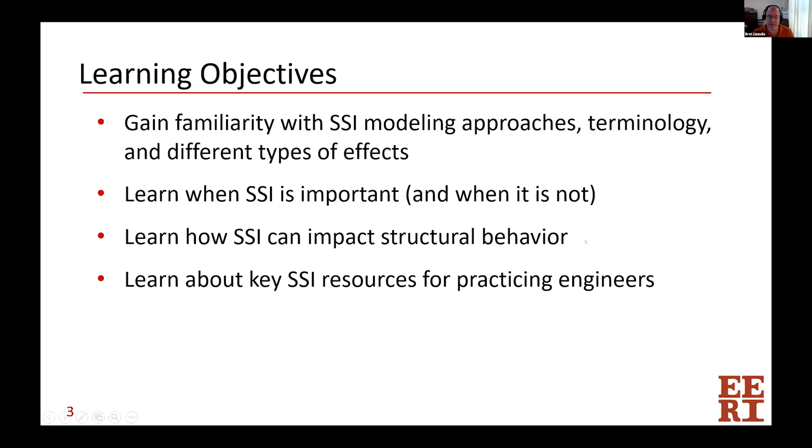And then an understanding of some of the key resources that have been developed in recent times to help engineers implement this. So let me start first with some terminology. Every discipline has its lingo, and this is one set of terms that's been developed and I think has a general consensus in the community.

So we'll start with this building on the left that's embedded one story into the ground, and that UG there on the right is denoting the free field motion that comes up through the source and eventually reaches the site, and would be there, what would be experienced if the building didn't exist. On the way it's getting there, that's what it is. And then it's going to change as it gets closer to the building. So there's kind of two basic categories of effects that are part of SSI.

One is called kinematic effects and the other is called inertial. Kinematic interaction changes that free field motion, and what the building at the bottom feels is that foundation input motion, which is not the same thing. Inertial effects are a little bit like the inertial loads that we are used to in the superstructure - the mass of the building being accelerated and generating forces that the members have to resist. A similar thing happens with the soil that's near the building and the foundation itself, and there's a combined soil structure effect that includes those inertial issues.

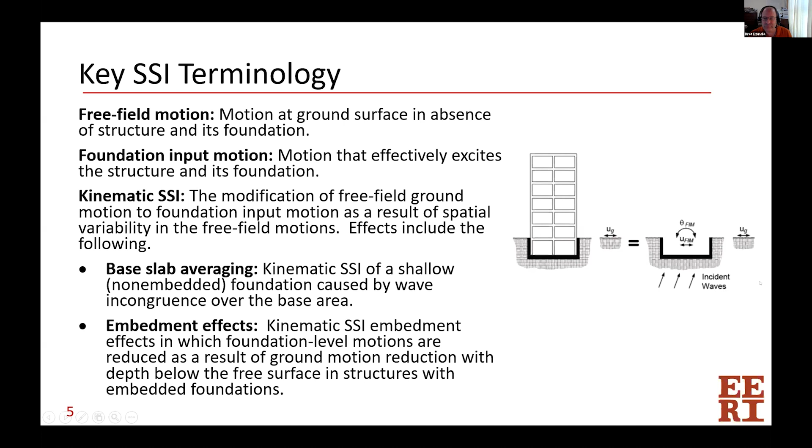So on the inertial side, three effects are commonly identified. One is that if we account for the softness and flexibility of the soil and its ability to augment the movement of the superstructure, the building can tilt more than it would if you just fixed it unrealistically hard to the ground. Then that will increase the building period, and that period lengthening can affect the way response spectral forces are experienced in the building. They can go up and they can go down - they typically go down, and we'll talk about that in more detail.

Two other effects, less commonly implemented or even discussed by structural engineers, are two forms of damping. One is called radiation damping, where that damping in the soil structure system of the combination of the foundation and the nearby soil is caused by the generation and propagation of waves away from the foundation, which are in turn caused by different dynamic displacements of the foundation relative to the free field displacement. So the ground and the building are in contact and moving, but not necessarily moving identically.

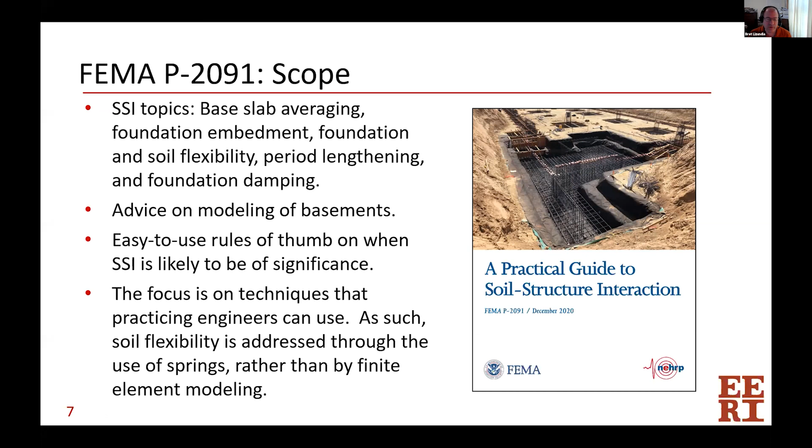We're focusing on techniques that practicing engineers can use. So this is less a sophisticated treatise on finite element nonlinear modeling and more a discussion about the wonders of springs, and when to use them and how to do that.

Sophisticated infrastructure projects, a nuclear power plant, a buried liquid gas tank, an important underground subway, might be done this way, where the soil elements in a big model are also finite elements. The vicinity around the boundary of the structure is done a little differently, but with similar kinds of elements, and then the structure itself is part of that.

This is computationally intensive and requires a lot of skill, knowledge, and usually special software to do. That is not what typically happens in the structural engineering community for buildings.

What we're used to using as a building engineer is a much simpler substructure approach rather than a direct analysis approach, where we put vertical and sometimes horizontal springs underneath the bottom of the building to represent the soil and sometimes the foundation flexibility. That's the focus of this design guide and the focus of what I'm talking about today.

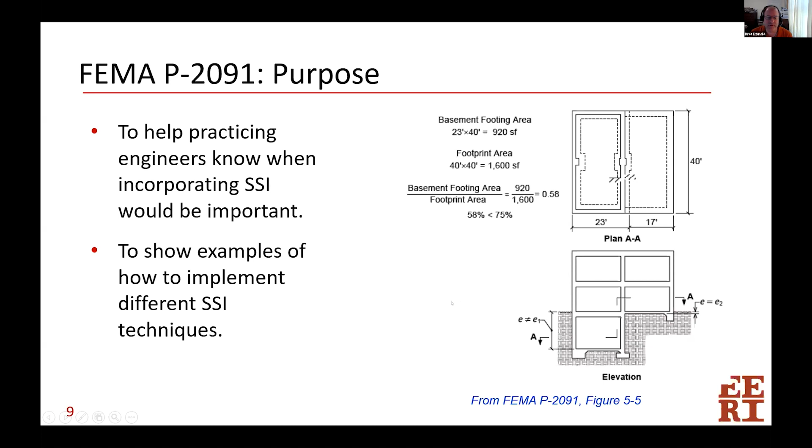So we have lots of pictures like this of different examples to help people understand what are sometimes kind of cryptic provisions in the building code.

The target audience is obviously engineers, of two kinds. Our primary audience is practicing engineers who are definitely familiar with seismic design—they've designed buildings but may not have ever implemented or used SSI. They may have just fixed the bottom of their buildings, doing a great job, understanding the building code very well, but now face a need to deal with SSI, and this is something they can turn to. The secondary audience is people with a little more experience who may have done some soil structure interaction work, often with vertical springs on a past project, but now want to go farther and tackle other areas of SSI.

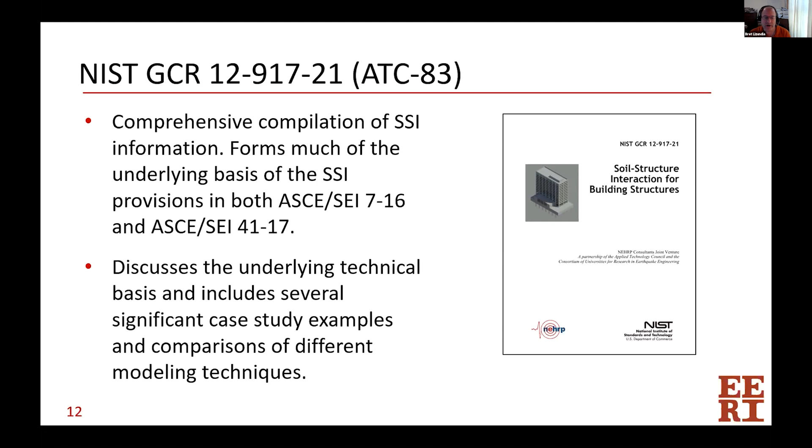Besides that, we had some significant case study examples. It was pretty sophisticated, and to use this you would usually be relying on a very knowledgeable geotechnical engineer who would take advantage of it. So it wasn't intended, nor is it really that easy to use, for your average structural engineer like myself.

So this slide, I wanted to give you a feel for kind of the world of other resources that have happened and the progression over time, because it's not just the two documents I've mentioned so far. There's a whole lot of work.

Early SSI has been around for a long time. Lots of papers and analyses and work was done by some seminal researchers in the field. But from the everyday building side of the world, it was relatively little used. It was perceived as challenging, difficult, with a lot of really long equations that you needed to be fairly experienced to understand, so it was rarely implemented in everyday practice.

Then there was a group of FEMA and ATC documents where this began to be included in a more practical way with provisions. Then this seminal work that John was in charge of came out, and the newer updates to ASCE 41 and ASCE 7 included that. There was a design guide, the FEMA P1051 design guide, which provides worked examples for how to design buildings for seismic issues in general, including some discussion of soil structure interaction.

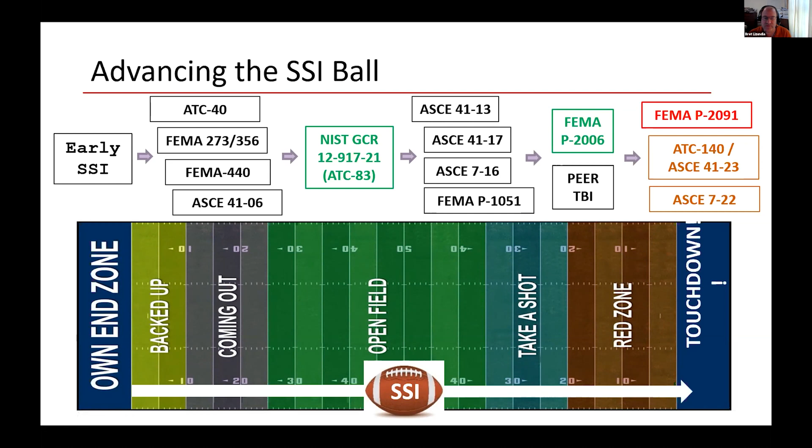So let me go over one of those earlier chapters to give you a feel and hopefully some takeaways, particularly for those of you where this is somewhat new. When is SSI going to be likely to be important? Some of these are pretty simple, and I've already mentioned them to some degree.

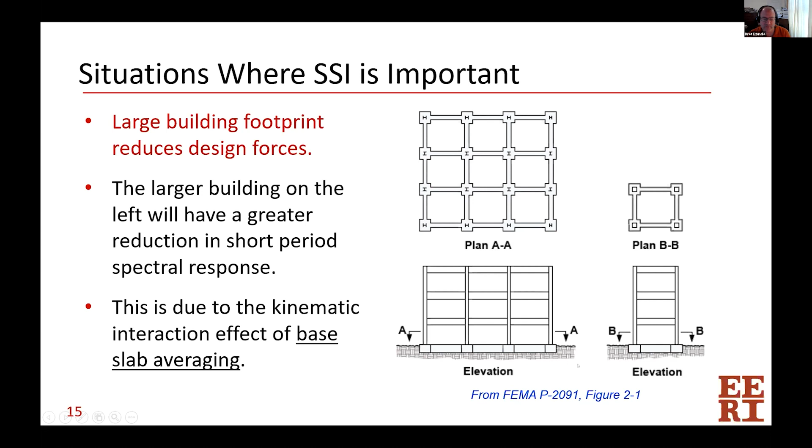Somewhat similarly, the other kinematic effect of foundation embedment tends to reduce that. So the building on the left, if it had the exact same footprint but has 2 stories of basement embedment, will tend to have lower forces. Both of these effects tend to be a short period focused issue - the reduction in the long period range is usually negligible, but the reduction in the short period range, and these are short period buildings on the screen, is where it matters, where this kicks in.

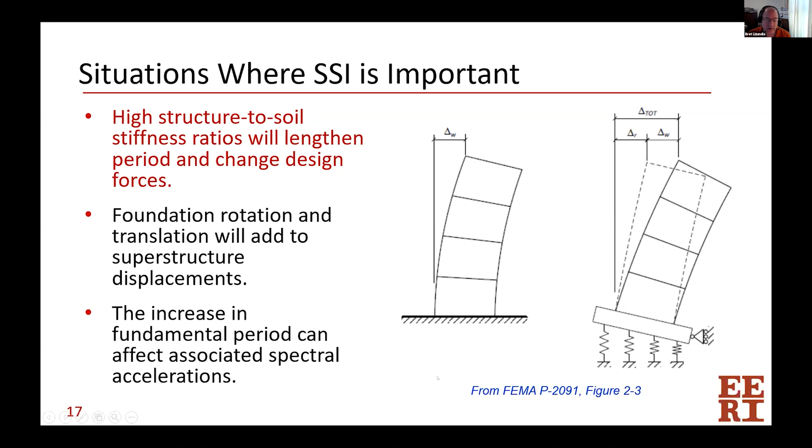On the inertial SSI side, if we have a high structure-to-soil stiffness ratio—meaning the building is stiff, like a shear wall building, and the ground is soft—then we tend to get more rocking. If we model a cantilevering shear wall as fixed base, the superstructure has movement and displacement at the roof, call that delta W. If we model that with springs to account for vertical soil deformation, that translates into additional horizontal displacement at the roof, delta F, increasing total displacement. That increases the period, which changes where you are along the response spectrum.

For example, if we're a short, stiff building and we increase the period, we might climb up a site-specific response spectrum and actually increase the forces at the first mode. On the other hand, and a bit more likely, if we're on the downward side of the spectrum and we increase the period, we go farther down and tend to decrease the spectral accelerations the building experiences.

This up-and-down movement of shear walls or brace frames can not only change the period but can change how the building behaves, sometimes in fundamental ways. Here's an example from the ASCE 41 design guide, slightly modified. In the fixed-base model, you can see the deformed shape at top, and the critical element is the bottom-story compression brace, which is highly overstressed—the utilization ratio, Perform 3D's term for demand-capacity ratio, is way over 1. The weak link here is compression buckling.

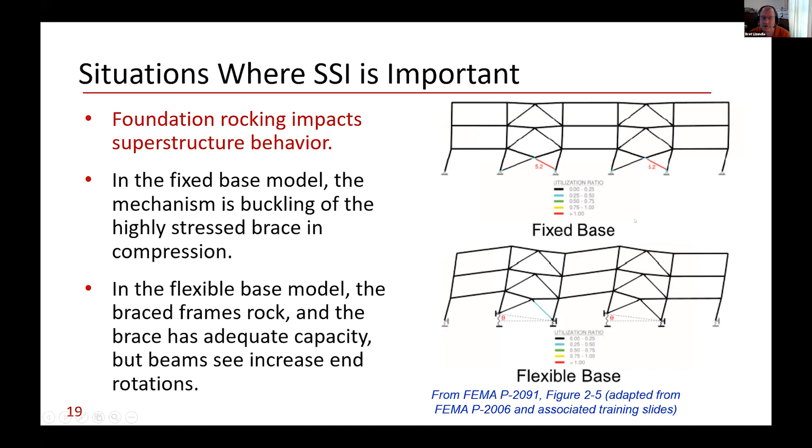But if we model foundation flexibility with vertical springs, the bottom picture shows a totally different behavior—we get rocking of the brace frames, and the demand-capacity ratio in the compression brace drops dramatically. We get more movement in the beams and beam-to-brace connections, but less demand on the brace frame itself. So in this example, the fixed-base building fails and the flexible-base building works—that's a big deal. It won't always be this way; we didn't fake the example to make this happen, it just worked out that way and we were pleasantly surprised. But it shows the value of modeling foundation flexibility, even simply.

So we developed this rule of thumb. John had actually proposed this in the ATC-83 project, and we fleshed it out in more detail and more specifically. There are step-by-step rules, but it boils down to a simple idea attempting to capture the structure-stiffness-to-soil-stiffness relationship. You just need to know three things, two of which are pretty easy.

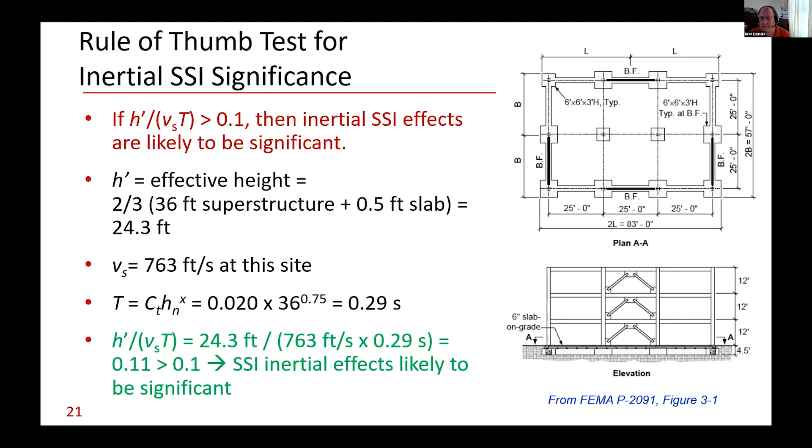One is the effective height, essentially the centroid of the building, nominally taken at two-thirds of the height plus the depth of the foundation. The second is the period, using the code equation from the equivalent lateral force method. The third is the shear wave velocity, which you can get from the geotechnical report if available, or extrapolate from site classes and their definitions. Plug those three numbers in—if the resulting number is bigger than 0.1, we deem that you're likely to have potentially important, significant inertial SSI effects.

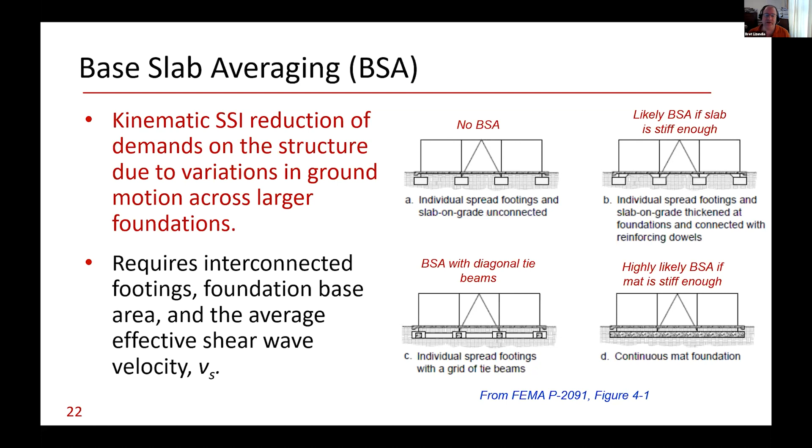So these pictures don't exist anywhere, and so we added things like this for a practicing engineer to say, which one of those guys do I have, and do I qualify really? So it's kind of like the commentary that's sort of missing in the codes that we have.

So let's do a little example to show you the impact of that. If you had a building that was 100 feet by 400 feet, a pretty big building in my world, you take the square footage of that, take the square root, that's the equivalent square, giving you the length on a side, that's 200 feet in this case. That's below the max you can use, which is 260, which comes from empirical data of what we have available from actual measurements. And then there's some equations which I'm not showing you, but they're not that hard.

But if you were in that short period range, you could take advantage of this and get a reduction on your design forces. Embedment's very similar.

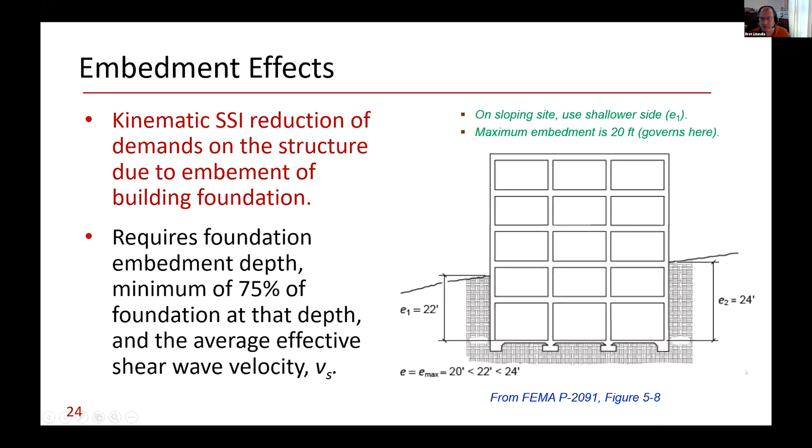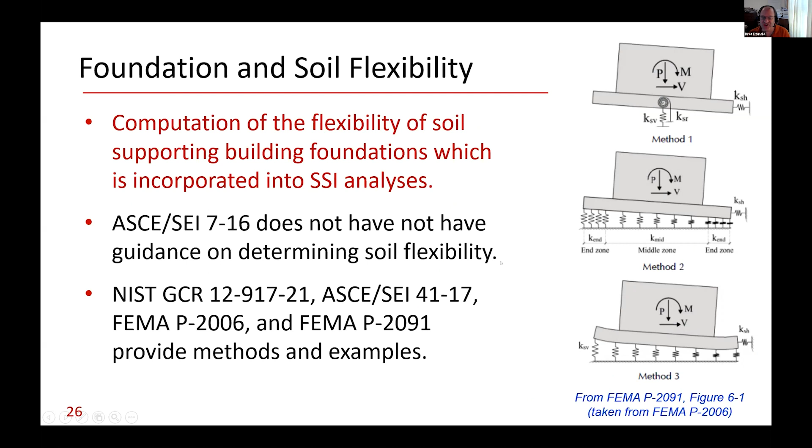So in order to model springs, you need to have some techniques, some provisions, some values for that. ASCE 7 doesn't tell you how to do that. ASCE 41 does, and so do these other documents that I'm listing there. Here's some examples of different ways people do it, like the most simple one at the top where it's a concentrated spring, and then other versions in there. So we have a chapter synthesizing that information and showing you a worked example on it.

There's a chapter on foundation damping, which talks about two different kinds of damping, with two different sets of equations. Soil damping is a very easy, simple equation. Radiation damping is a lot of work, many, many steps.

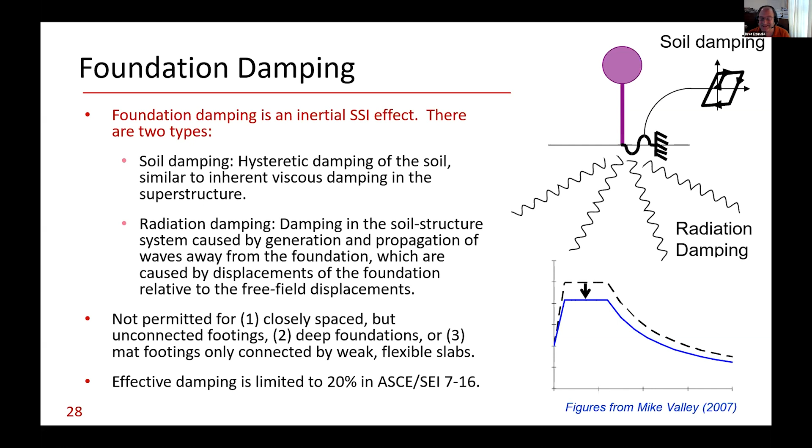So we have a long step-by-step process, do this, do this, do this, in the order that makes sense rather than the way the equations are written in ASCE 7 or 41. You can't use this for deep foundations. It's a shallow foundation kind of effect, and there's a limit of up to 20% damping. Going from the 5% we're used to using to 20 is actually a huge difference. But there's a floor on how far you can go.

The chapter we included on how to model basements includes some really important work that the ATC 83 project, this NIST document, had developed, where we did a baseline model, the one on the right, which was our fanciest substructure model with variable depth springs horizontally, different kinds of damping in there, to really try and do our best job of modeling it.

But it's not something you would typically do in practice. And then we compared that against all these other simpler techniques to see which of the simpler techniques was a close predictor of the best model, the baseline model.

What we found is that the most basic one, where you just fix the bottom of your building, get the loads out of that, and then throw them in a second model to design the foundation, doesn't do a bad job for moment frames. Doesn't do a great job for shear walls, but it works for moment frames.

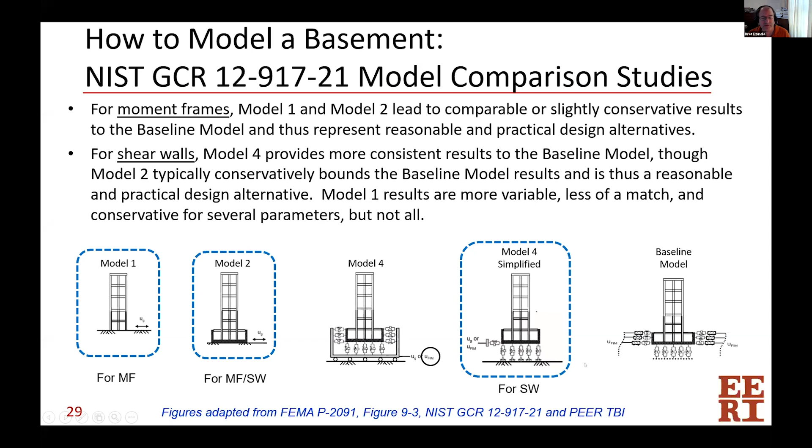The second model, where you ignore the dirt, you include the basement plus the superstructure, and fix the bottom of it at the bottom of the basement level, is actually a pretty good predictor both for moment frames and shear walls. And then there's another model we call the modified bathtub model, model 4 simplified, that also does a good job. This is the one that's in the PEER TBI document.

I'm not showing the ratioing by R values that's code required if you have different R's, but that's not the important point here. Model 2 is where they're all combined, and the shear walls in the basement and the brace frames above are together. We show you the subtleties of how to do this—it's actually kind of a tricky thing about where you scale and where you compare things.

You need a little bit of acceptance from your building official to really apply this. But this is, in my opinion, the right way to do it, and I have generally had this approved by the authority having jurisdiction.

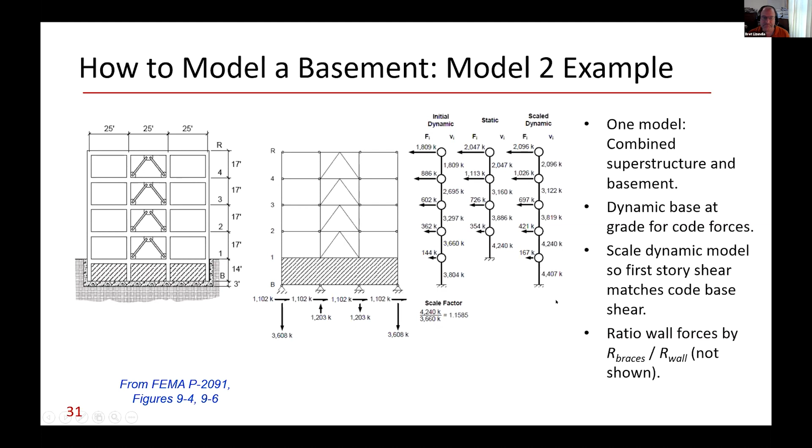I mentioned that we had these appendices for detailed examples, many pages, many issues. Here's a 2-story buckling restrained brace frame building sitting on spread footings.

We show both horizontal and vertical foundation flexibility, how you derive those equations, how you would put them into this model. And then we show the implications of soil damping, radiation damping, and base slab averaging. Really importantly, we also show the limitations of how far you can take these things and what you would really get in terms of the difference in the sizes of members.

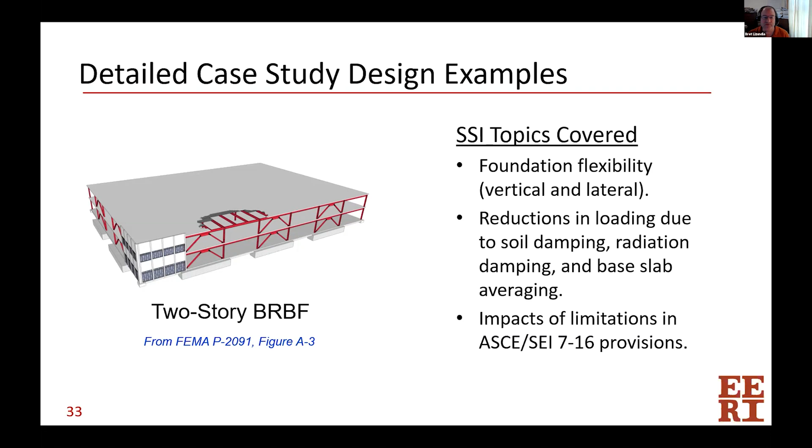So we have a fixed base result, and then we have different flexible base results to show you how the footing size and the brace size would change depending on whether you included these effects. And similarly, we did the same thing for a taller dual system concrete building, with shear walls and moment frames in one direction and moment frames in the other direction. We've got a whole host of other SSI effects that we covered in there.

So I'm going to wrap up here with some final tips, from my point of view but also from the authors of the design guide. Reassuringly, once you've got a design guide like this, or you've gotten your feet wet, I don't think most SSI is that hard to implement. It looks a little daunting if you haven't done it, but once you've gotten in, like a lot of things in life, it's probably easier than you would have thought originally.

One of the drawbacks is that it's often iterative. In a fixed base analysis, you fix the base, run the model, get the results, design your elements, and you don't have to iterate - you could, but you don't have to. But a lot of times in SSI we need to converge on some results, so it can take a couple more rounds than it would have otherwise.

Most of the time, when you lengthen the period, you're going to go down on that slope. But if you're on a site-specific spectrum that didn't have short period truncation, like the one I showed you, then you could get an increase in loads. Hopefully you're convinced that there are some buildings sensitive to rocking where you could get a really big difference depending on whether you account for that rocking behavior - we showed you some pictures, so I hope that's an important takeaway for you.

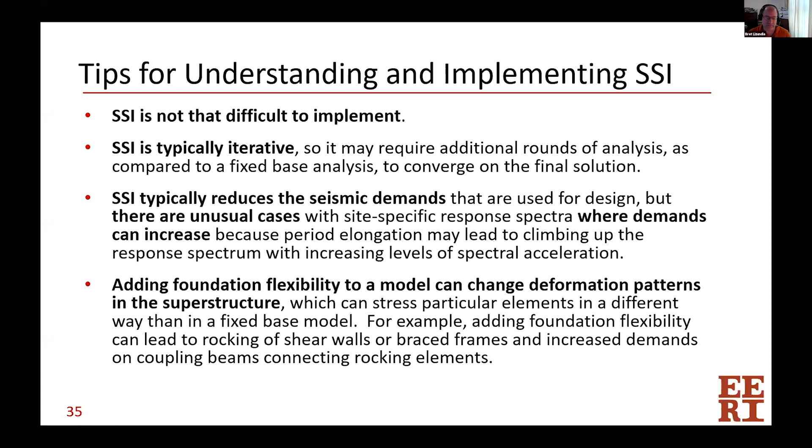Shear wave velocity, which I didn't talk about much at all, is actually a pretty subtle thing. There's a whole host of different versions of it and different ways it's defined in different situations, and that's really hard to parse and understand in the building code. So we try to do a good job explaining that issue and how to get the right one, and that has actually led us to some code change provisions making their way through the next edition of ASCE 7, pretty much because of this project.

And then I had mentioned there are limitations, and ASCE 41 is a little more relaxed. So I will end there.

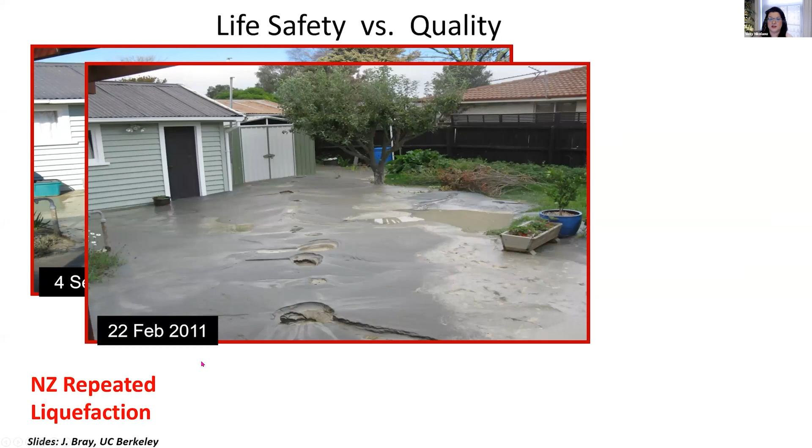This is a house where the life safety objective has been met over and over again in the events in Christchurch between 2010 and 2011. This is a residential house that Professor Jonathan Bray from UC Berkeley monitored through the different earthquakes that happened, and as you know, there was repeated liquefaction from which we learned a lot. But look at this house: liquefaction happened in the first event, the owner fixed it, then sand boils appeared again in the February 2011 event, and then he put pavers to hold the ground down.

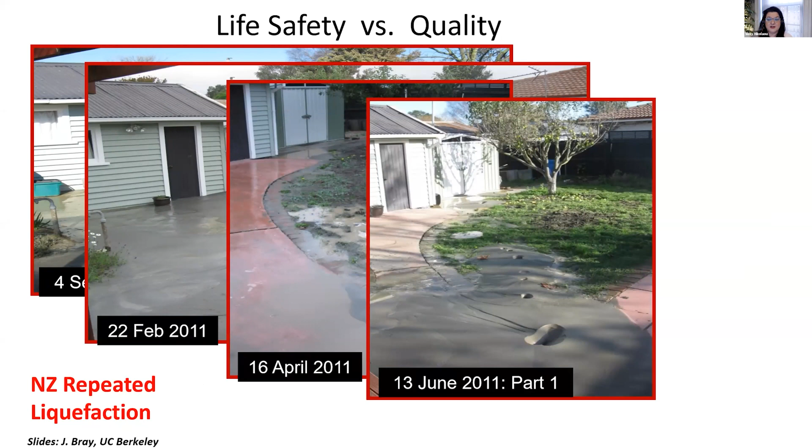And this did not do any good for liquefaction, in April, then in June, and again in the second part of June. So you can imagine the mess happening inside that house, where structural safety had been satisfied. This situation put this and many other residences in the category of a flood zone because of the groundwater levels after all these settlements. So the houses lost tremendous value, and there were a lot of problems with insurance that I'm not going to go into, about flood versus earthquake insurance.

So life safety was satisfied, but not necessarily life quality. I think we are at the point of having used life safety for decades now, where society is demanding something better, something more. We can call it the R word of resilience, or what we usually associate with, which is a bounce back strategy. I would rather go forward to something better than what you just saw in New Zealand.

So the life safety concept is no loss of life after an extreme event, which is of course what we all want. The structure can give you an opportunity to get out alive, but it could be heavily damaged, and could even have to be replaced, even with the newer codes we have. So where is life quality in all that? I find life safety to be a little of a deceiving factor, because safety means I'm doing better, at least for me.

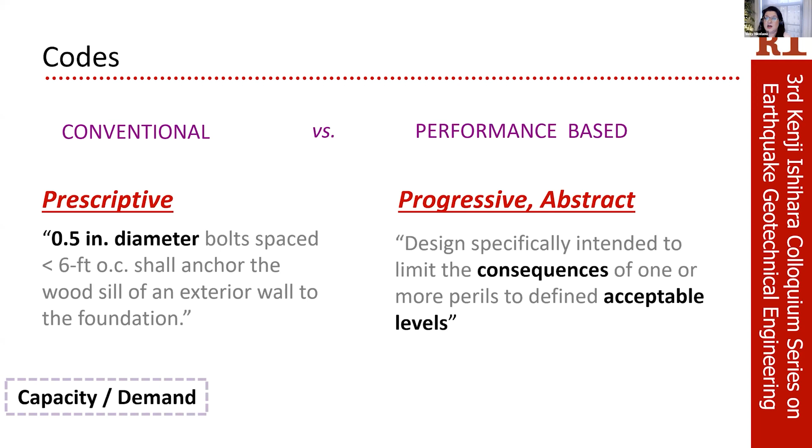We have evolved to a more progressive, sometimes more abstract, performance-based concept, where we are looking at behavior, risk, and consequences, and whether those are at acceptable levels for different levels of earthquakes. Still, this concept is going to get into codes up to a level of safety or reoccupancy, as you can see in the known possible post-earthquake states.

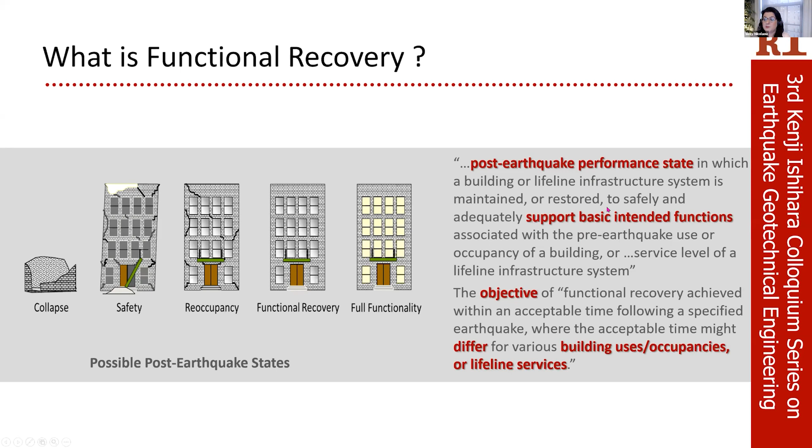So here comes the next generation of functional recovery, where functional recovery is defined as an objective that can be achieved within an acceptable time following a specified earthquake. This acceptable time may be different for buildings or lifelines. It is a post-earthquake performance state in which a building or lifeline system is maintained or restored to safely and adequately support basic intended functions associated with how things were before the earthquake.

So I tried to put something similar together for a geostructure, a dam, or a slope, as to how this would look. But it is so much more general than that, because in order for a building to function, the services to the building have to be there, and everything has to be connected. So it's not the isolated structures or geostructures anymore that we have looked at in performance-based design.

So a report by NIST and FEMA was published earlier this year that defines in greater detail what the main needs are to move to a functional recovery framework. These needs are summarized by seven main recommendations in this report, which is available. This was a big study managed by the Applied Technology Council on behalf of NEHRP, NIST, and FEMA, and came up with several recommendations in response to the reauthorization of NEHRP.

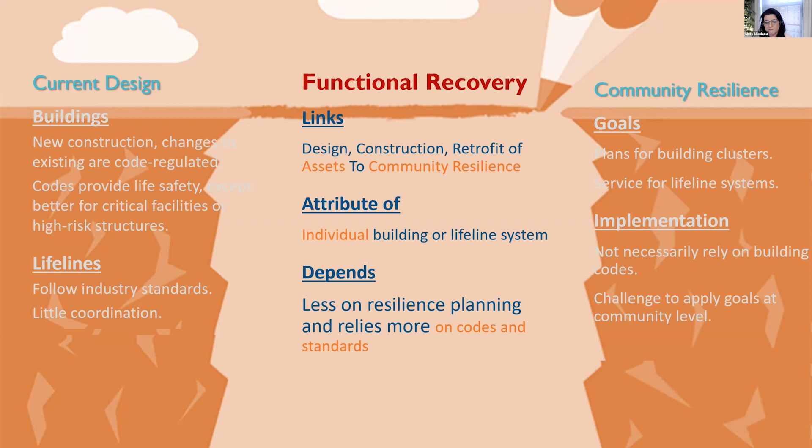With that, I would like to connect some concepts and aspects of our design that involve soil structure interaction or geotechnical earthquake engineering to functional recovery.

So what are some facts that we know: recovery times or downtime can cause multiple times the loss of the immediate structural damage, as we saw in Hurricane Sandy, for example, that had not only local major effects that we see to date, but also global effects. Imagine that you shut down Wall Street, which is what happened, and what the effects are on a global scale. I'm using a hurricane, but it's the same for earthquakes and other hazards.

And when we're talking about functional recovery, we have to think of cascading hazards. The other mega trend, particularly for our infrastructure lifelines, is that we are dealing with climate change. Climate change has to do with slow processes we can call chronic stresses that are eroding the soil or creating slow evolving processes that can create a more vulnerable subsurface.

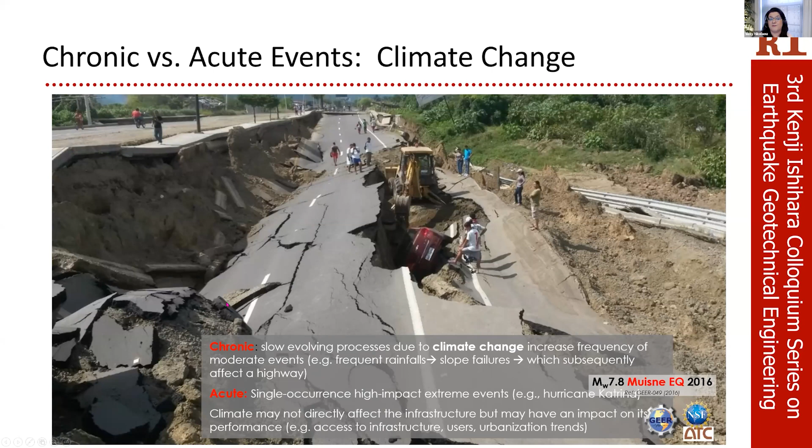For example, very frequent effects - this is an image from the 2016 Muisne earthquake in Ecuador, where I will show what happened after frequent events when the earthquake occurred in a landslide. We also have acute extreme events that could be initiated by climate, and this is our new norm. This may not damage specifically an infrastructure system, but it can create lack of access to that system, which is going to affect functional recovery.

And lastly, what we have seen is that now the maximum event may not be the most detrimental for a system or even for a geostructure. That has to do partially with the tremendous growth in population, where we are forced to build on marginalized lands. So the perception of risk now is changing, because repetitive small events, even if they're not driven by climate change, could have detrimental effects because of the exposure of population, because of the higher urbanization that we have to do.

Should geo-professionals care about this? I mean, we should all care about this. ASCE just released the failure to act report - that's another report that would be great if you would like to see, if you haven't done so. What ASCE said is that if we project to 2039, our overdue infrastructure bill would cost each one of us $3,300 a year. And they have a lot of cool stuff about what you can do with this money instead of spending it on that, and moreover the tremendous impact on our GDP and jobs and all that.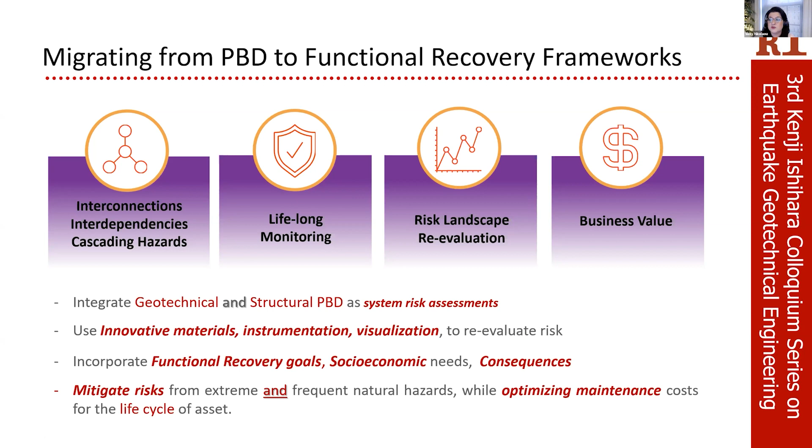We have to incorporate functional recovery goals into decision-making and also look at these more frequent events, and look at how much our assets can give us back and find ways to present this as a business value. One of the ways to do that is to fit it with optimization of the day-to-day maintenance funding, and that is very important.

So all these functional recovery concepts can come together to support decisions. There will not be a one-way street of an optimum in this conversation. We need to develop tools to explain different decisions as a risk versus investment conversation, and also life cycle expectations in our frameworks. Obviously, it's very complicated, right?

So I would like to talk about some challenges that I have seen that are in the way, and some solutions that could overcome them. One of them is that we need to do a better job in communicating.

I just heard in the previous presentation somebody calling soil dirt, which would be a very bad word for a geotechnical engineer. And it's always this big issue—why can't we work together? Why do structural engineers always consider soil a spring, and geotechnical engineers consider structure a load? And we know, as you just heard, it's not that simple.

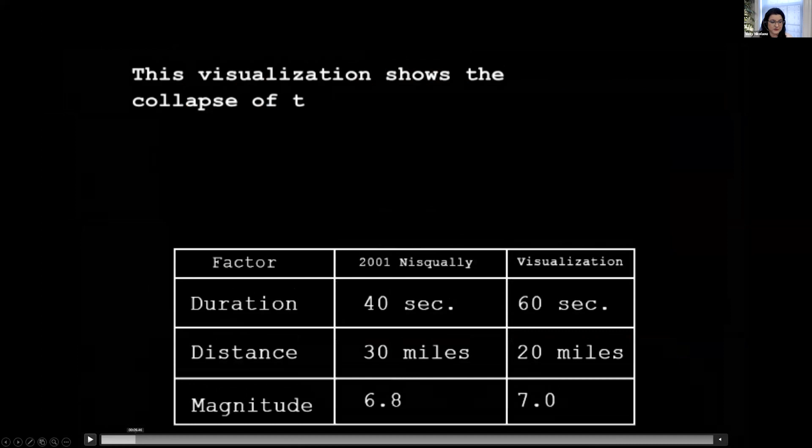It's an iterative process. We live in a nonlinear world where properties of soil and structure change depending on the levels of the strains. The damping is changing based on these strains, and we have tools to evaluate and understand them. We also have great tools to communicate risk, and maybe we are not doing such a good job in doing so. So I wanted to show you a great example of visualization.

This is a repeat of the 2001 earthquake in Seattle to support decisions for the Alaskan Way Viaduct. What you see here is a few years old. It was made by what was Parsons-Brinckerhoff, now WSP, from many aerial photographs of the Seattle waterfront and a simulation of the viaduct as it was, with different nodes and time histories of each of these models developed by engineers and peer-reviewed at the University of Washington.

This was done in order to show stakeholders and decision makers what liquefaction means, what strong ground motion shaking means—not just to the infrastructure, but to the lifelines, to settlements, to lateral spread, and of course at some point failure of the gas pipeline systems that leads to subsequent fires past the shaking, and tremendous destruction.

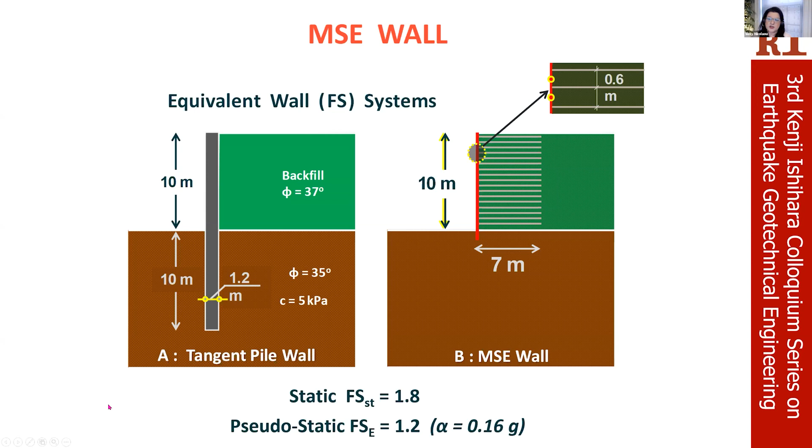And the MSE wall is by far superior. So in that case, if I was wearing my hat of the consultant, I would say that this wall has a lot of capacity and it could save me a lot of money. I could go and spread the reinforcement more. Instead of 60 centimeters, maybe I can have it every meter or more and save a lot in reinforcement. Or I could go and start looking at this, tying it to the research and try to make things happen. That's what we are trying to do.

So we use the analytical tools, and I think these are Abaqus analysis. This has been done by NTUA and Dundee universities in Europe. And what you see is the strains inside the soil and inside the reinforcement for the original design on top. And what you see on the second, where I wanted to save money, is that if I spread the reinforcement, then I am putting a lot of distress in the reinforcement, especially at the foot of the wall.

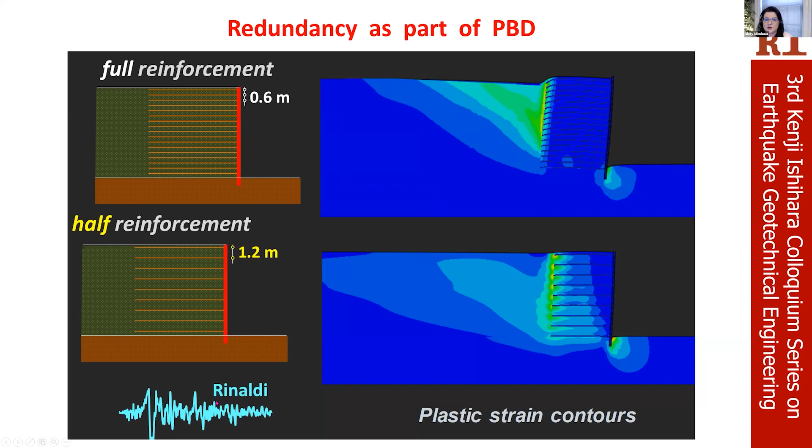Which means when the next earthquake happens, probably I'm not going to be redundant anymore. Probably I have taken what I could take from the anchors, and I would probably not have such a good behavior as with a full reinforcement. And of course, we have seen in earthquakes like in Kobe that stronger is not obviously always better.

And this is where the ideas by Professor Kutter and Professor Gazetas have come in, creating plastic hinging intentionally on the subsurface in the footing in order to relieve the loads from the superstructure. And of course, that has been an anathema of designers. How could you do that? How could the foundation not have an R equal to 1?

Well, because it's not practical, and because behavior-wise, as a system, you are penalizing so much the superstructure that you're making it very brittle and not robust. So this is to be done, right?

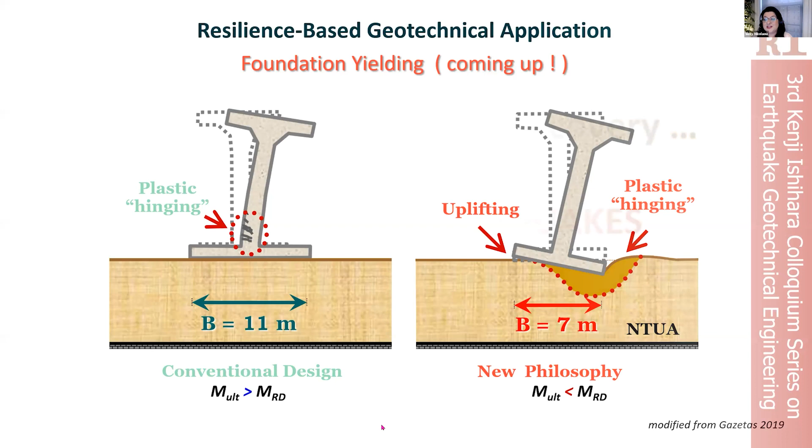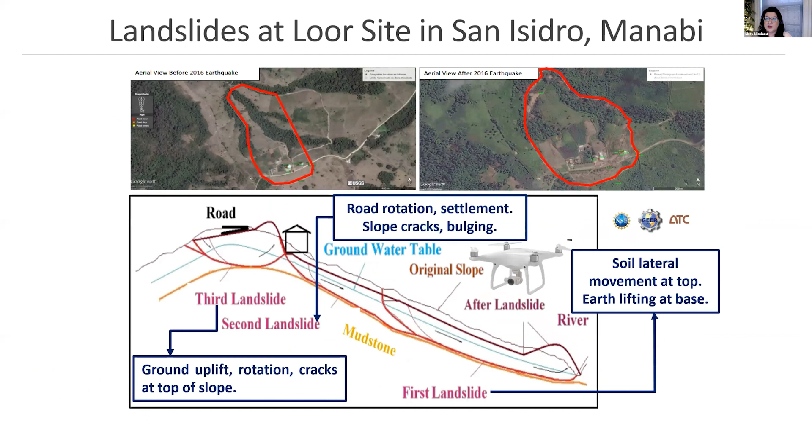It's not done yet. So in terms of using our rapid reconnaissance technologies, I wanted to show you what happened in Ecuador. After a lot of rains, an earthquake happened on April 16th and created a 3-phase landslide that was massive, and for which we collected a lot of data, including thousands of drone pictures that were flown regularly there.

So we collected maps from Google on how the slope was before the earthquake. And then we created a cloud of the images from the drones so that they are compatible to create a 3D model of the slope after it failed. And this is how you see it rotating.

So what does this help us with? We have this DEM, the digital elevation model, from the landslide that if we overlay with the before image, then what we have is true volumes being calculated automatically. So this was an effort done as a result of a GEER mission.

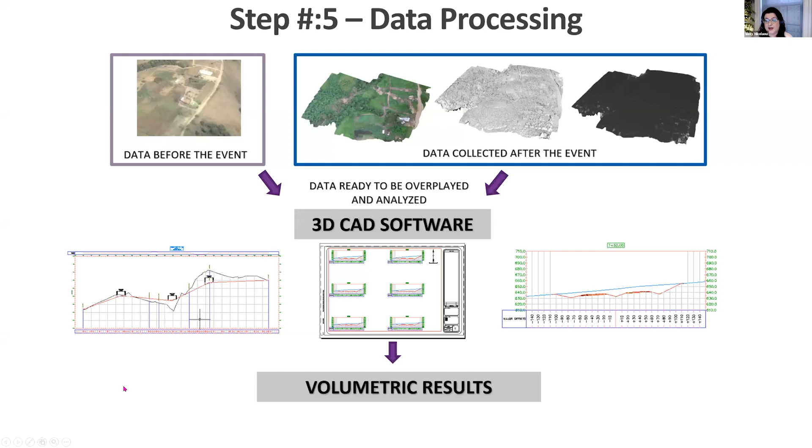The same group that created the video was able to put all that together, and with a relatively fast and easy macro in the 3D CAD software, we were able to develop sections and have volumetric changes very fast. And this is a section that you can easily cut with your mouse and immediately get slopes and volumes from these drone images, something that would take months to just get a couple of them.

So with that, we were able to combine ground motions that were nearby and soils information in order to understand and study this earthquake better. So I'll go quickly through some basic stuff that we need to think of when we are putting all these systems together, and our thoughts about how do we recover is to think about multi-hazards.

And the example here is from flood protection and the concept of raising the foundations in order to be on a higher level when the new 100-year flood comes. And that is great for floods, but if you look at earthquakes, like in this very fancy building, this creates the perfect soft story. So we need to think of both, and it goes the other way too.

As we intervene for earthquakes, we need to understand how we are affecting the other hazards. Also, we have to respect the geology of an area, the geologic history, and the geotechnical investigations.

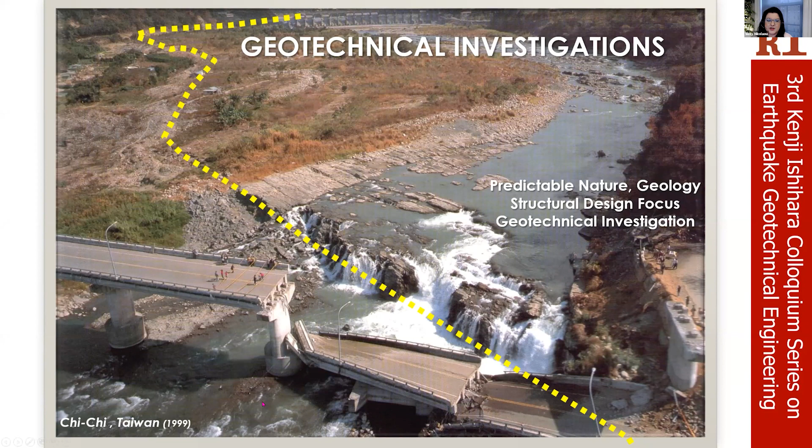So where do we go from now? I hope that this steers a conversation about how we can work together to reach these frameworks and these goals. So where are my takeaways: we need to have a basic engineering understanding of the behavior of systems above and below ground and how they work together.

We have to validate and calibrate computational models and test them also in small and large scale in order to make innovation our practice and reach the functional recovery goals, and incorporate reconnaissance lessons now that we have a lot of observations and organized data and map data.

And typically we study why things failed. But when you look at resilient behavior of structures, geostructures, infrastructure, we have to look at things that did not fail, although they should have failed. And we do have those. It's just that they are not as attractive as failures for us engineers, right?

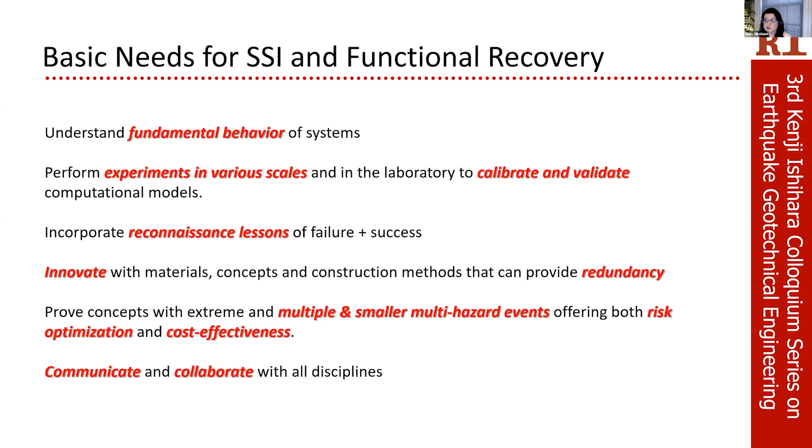With that, I'd like to just say that investing in functional recovery and overall community resilience is an obvious choice because it works. And maybe it's the only choice, because the alternative is no longer enough since we have major challenges to deal with.

There is a recent FEMA report that is very interesting that shows the value of building codes has elevated the return of investment in hazard mitigation from $6 to up to $11 for every dollar spent. And this is something that we need to learn to convey to our clients and to government when we are proposing solutions that mitigate hazards.

And finally, as civil engineers, we have not only the choice, we have the social responsibility to consider these types of designs, because they're going to eventually move us, using functional recovery, from life safety objectives to life safety and life quality objectives, which is something that we owe to our kids and to society, right?

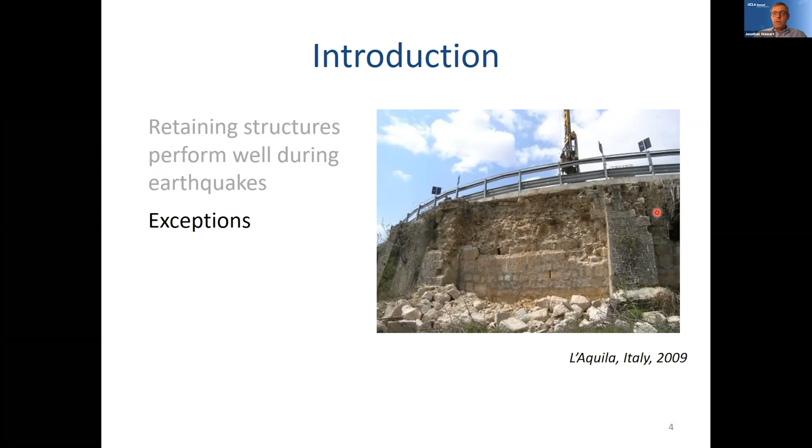Despite that generally good performance, we do require, in many contexts, the consideration of earthquake forces on our walls, even though many of the walls that have performed well really didn't have much seismic design in them.

If you're doing an analysis like that, you will capture in a very natural way the pressures that develop on these walls. Those pressures can be because the structure is responding and there's inertia, and it can also be because you just have waves going up and down through the soil medium.

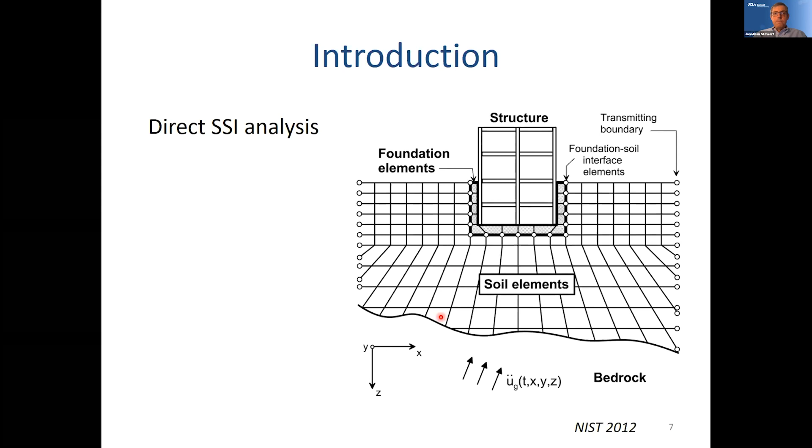But also, as Bret explained, we don't usually do that. For most structures, we don't do sophisticated finite element analysis, we do more simplified methods. In this subject of retaining wall pressures, the way that we typically do it, including in that NCHRP document, is something that I'll call limit state analysis.

In these limit state analyses, you essentially have an assumed geometry of a sliding wedge behind a wall. You have the normal non-earthquake forces - the weight, the reaction down here, the active earth pressure, if it is a wall that's allowed to move a little bit. Then you introduce a horizontal seismic coefficient that is related to the PGA, and that causes a seismic increment on the pressure, PE.

So we can work out the equilibrium of this and essentially relate KH to the cumulative reaction here. This was originally formulated by Okabe and Mononobe-Matsuo in the 1920s, so this goes back a long way.

This is a relatively modern presentation of that by Koseki, in which we have the seismic - actually it's a combination of the static and seismic coefficient here, KAE. It's the two forces summed and made dimensionless through this normalization, basically 1/2 gamma h squared. You see how this combined coefficient is increasing as the horizontal seismic coefficient goes up.

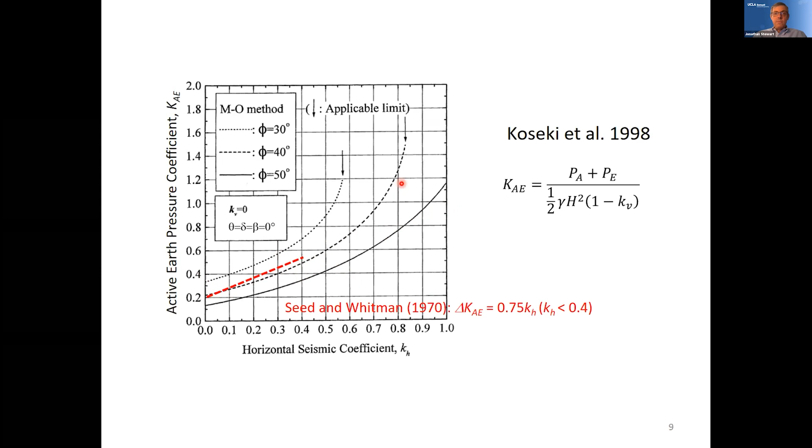Now let's talk about what we actually observe. By observation, I don't mean just seeing walls doing well or not doing well—those are observations too, but we don't know specifically what the pressures were. What I'll talk about here are pressures we can actually measure or calculate, through centrifuge modeling measurement or dynamic SSI, essentially direct analysis where we compute it.

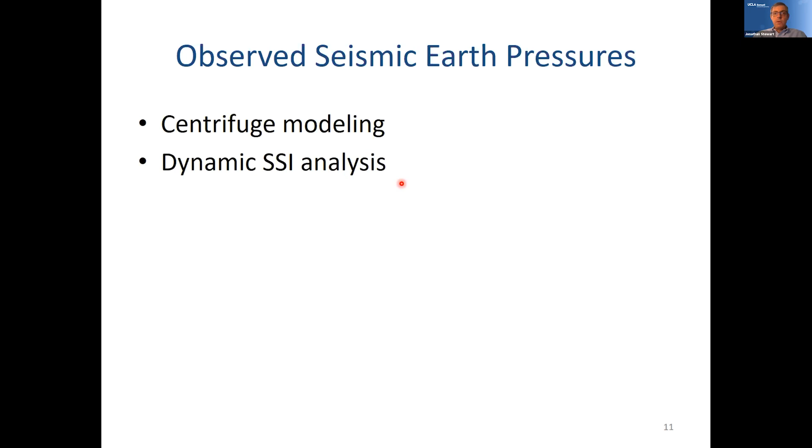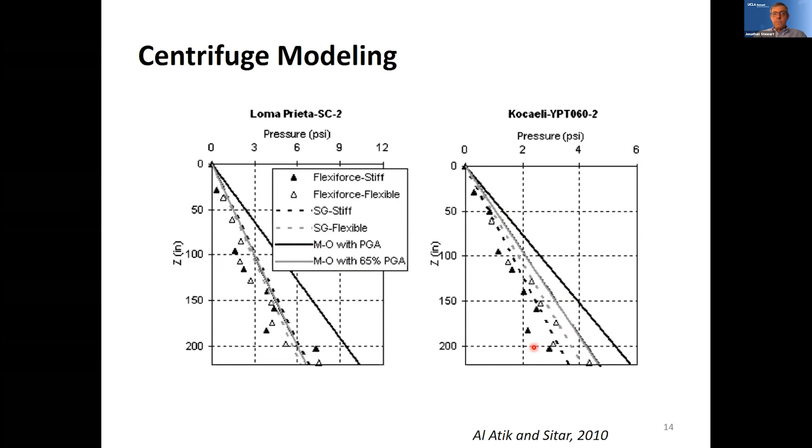They found that for this particular earthquake, using 65% of the PGA is pretty consistent with observations. They also tested two other ground motions, one from Kocaeli, where the same process was undertaken—again there's an over-prediction. If you apply the 65% rule, it still over-predicts. You could apply a different factor, maybe 50%, to get a match in this case. But the point is you'd have to apply a different factor for every ground motion to get the theory to match the data.

The takeaway message I got from this series of very useful experiments is that total earth pressures are below the Mononobe-Okabe predictions. Subsequent tests—a whole series run with different PhD students—consistently found that limit state methods were always over-predicting what was measured. Some methods to massage the PGA a little were introduced, but the straight Mononobe-Okabe procedures were over-predicting.

The next set of observations I'd like to talk about are dynamic SSI analyses. There have been many such studies; I've listed some of them here. I'll talk about one study by Farhad Ostadan, 2005. He has a rigid wall, elastic soil, and a rigid base underneath where the ground motion is input. That ground motion is broadband, meaning there's energy across a wide range of frequencies, including at the fundamental frequency of the elastic soil medium sitting on top.

In site response, if you excite a medium with a rigid base, and there's energy at the fundamental frequency of that medium, you get a very strong modal response with a great deal of amplification. That produces pretty large pressures on these walls because they're rigid and not allowed to rock or move with the soil.

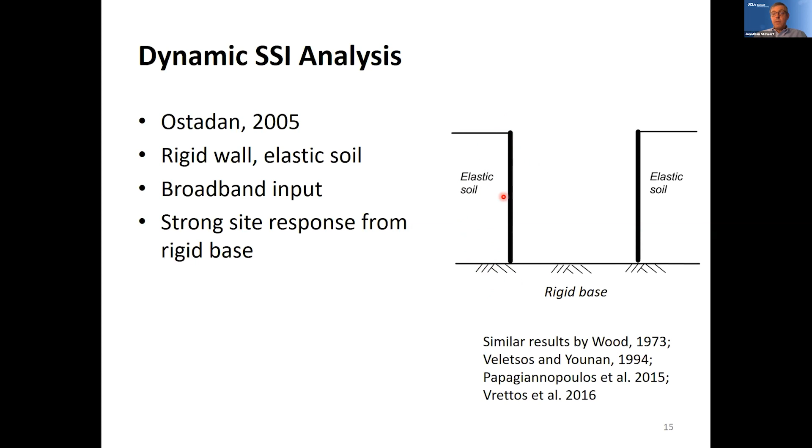If we summarize this series of observations, I should mention Ostadan's results are typical of other findings as well, so he's not really an outlier. We have centrifuge tests providing pressures appreciably smaller than Mononobe-Okabe. We have analyses of walls with these particular conditions, widely looked at in the literature, which provide pressures larger than Mononobe-Okabe. So there's agreement that Mononobe-Okabe or limit state methods don't really work, but do they work in the conservative direction or the unconservative direction? There's no consensus on that.

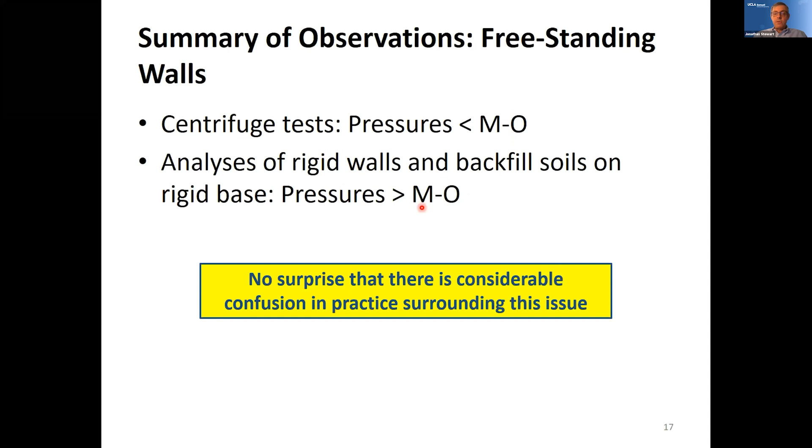That leads me then to what we're proposing. We were motivated to see if we could resolve these conflicting findings from the literature by taking a more fundamental approach to understanding why we see earth pressures, or we don't, in a given situation. This is fundamentally a soil structure interaction problem. The rest of this presentation will talk about how we can use soil structure interaction to understand these pressures. We have developed this sufficiently that we have what we think is a practical model that can be used.

So the SSI-based modeling, as Bret introduced, has fundamentally two pieces to it: inertial and kinematic. Either one of these can be the controlling source of seismic earth pressures in different situations. But what they have in common, and this is the single most important takeaway from this presentation, is that what is really driving seismic earth pressures on walls is whether you have relative wall-soil displacement.

Where you have relative wall-soil displacement, you get earth pressure. On the other hand, if the wall and the soil, for whatever reason, are moving more or less together during the earthquake, then there's no pressure. It's as simple as that. So that's the basic concept. The tricky part is, when do you get large relative displacement and when do you not get it? We'll look into that going forward, starting with the inertial part.

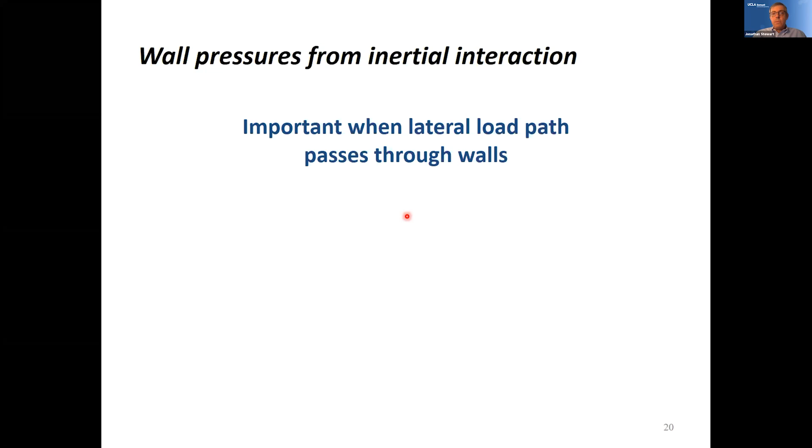A really important consideration with the inertial side of this is what is the path of lateral loads from a building structure down to the foundation, and does that path go through the basement walls or not? If you have a situation where the lateral force resisting system is the structural frame, and that frame is connected to basement walls, it's unambiguous in this case.

It clearly is part of the system. These walls are in the basement. So you will get an inertial contribution to the pressures because the walls are going to be pushed back and forth. They're going to deform these springs, and those, of course, are the pressures we're talking about.

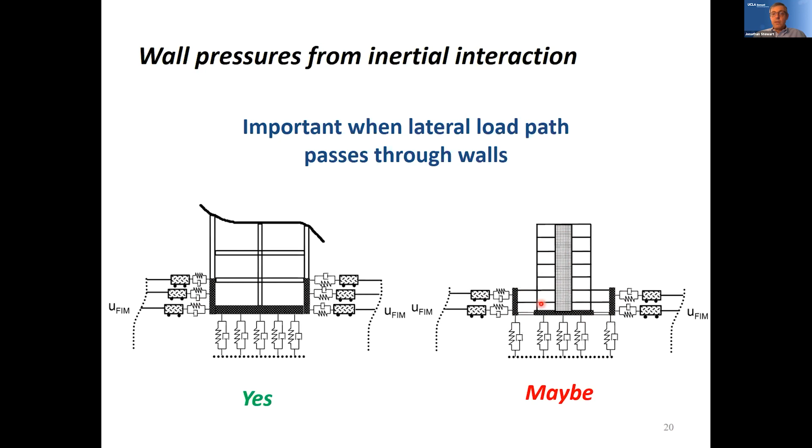In another case, with more of a podium structure, you have walls off to the side. The foundations of those walls may or may not be well connected to the foundations of the core of the structure. The structure may have brace frames or a shear wall carrying the bulk of the lateral loads, going directly down to this foundation. How much these intervening elements distribute shear force or moment into the walls depends on some of the structural details. It's hard to say in general in a case like this, but that would be the main consideration you'd have to work on in collaboration with the structural engineer to decide.

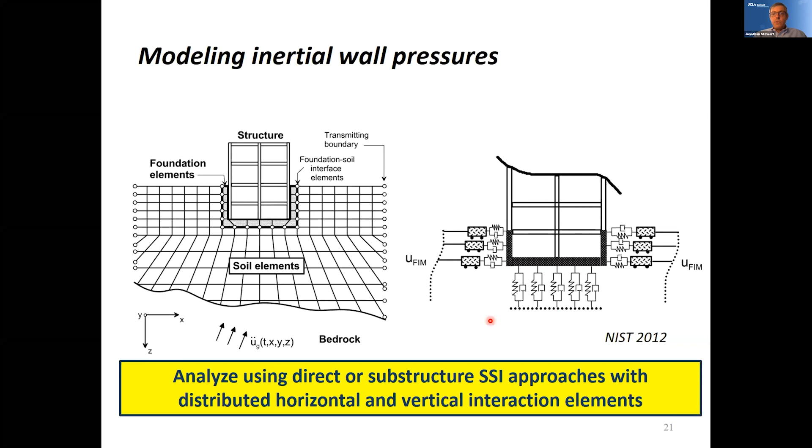You could model that either using the direct methods we've talked about, or the substructure methods that Bret introduced for us. But those methods kind of already exist through the NIST report. Bret's report through ATC provides some very good practical guidance to supplement this 2012 report. So we have methods in our toolbox by which we can evaluate these inertial contributions, so I won't be speaking more about that. The work I'll mainly be talking about has tried to solve the kinematic problem, for which we haven't had solutions. Okay, so that's what's next.

The kinematic interaction mechanism is just an extension of what Bret introduced with the foundation input motion. We have a free field motion, the motion that would occur at the site if there was no structure. Then you have a foundation motion, which deviates from the free field motion because the ground motion is spatially variable, both in the vertical and horizontal direction, and the stiff foundation will average things out. When this FIM is different from the free field motion, you're going to get significant earth pressure. When these two are about the same, you're not.

So in order to help underscore that point, what I'd like to do is walk you through some simple schematics to help understand when seismic pressures develop under these kinematic conditions without an inertial contribution.

So what we're looking at here is an element of soil without an earthquake yet. There's a vertical stress and a horizontal stress.

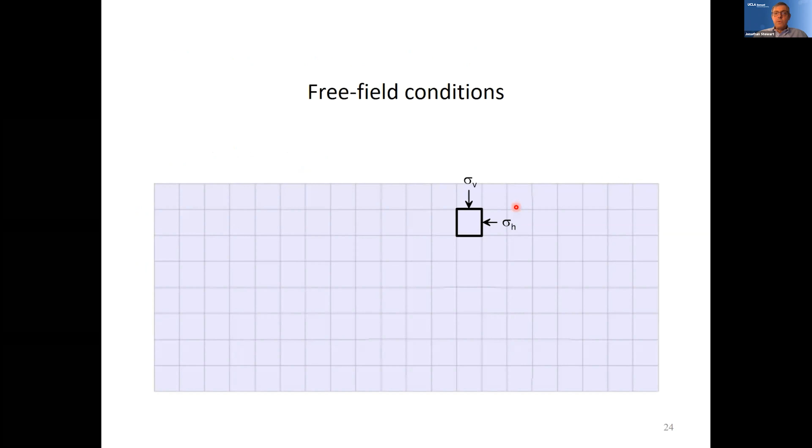And when a seismic wave passes through this, you see the deformation. For sure, that seismic wave will produce an acceleration. But that acceleration and the stresses associated with it will be carried on our element through a change in the shear stress on the horizontal and vertical planes. There is no change in the horizontal stress here. So my point is that you can have acceleration and have no change in lateral earth pressure.

In fact, this is fundamentally what happens in all ground response analyses.

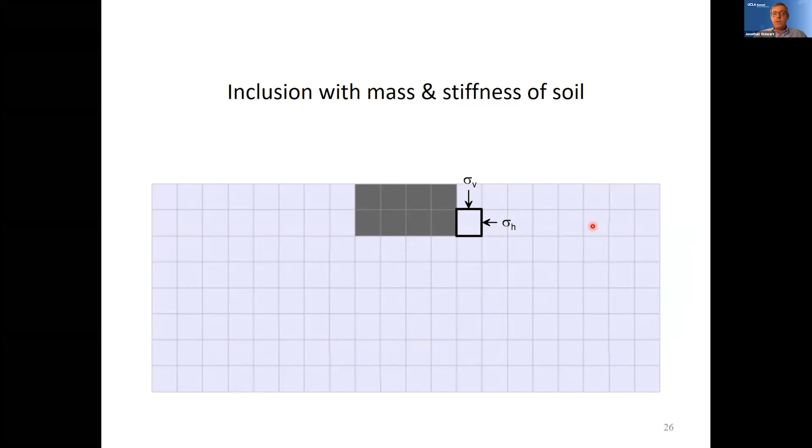Now, if we have a structure that's embedded below the surface, and in this hypothetical structure, if it has the same mass and stiffness properties as the soil, then it will deform exactly the way the soil does. And again, you'll have no seismic earth pressure because there's no horizontal movement that is different between the structural elements and the soil element because of the fact they have the same mass and stiffness.

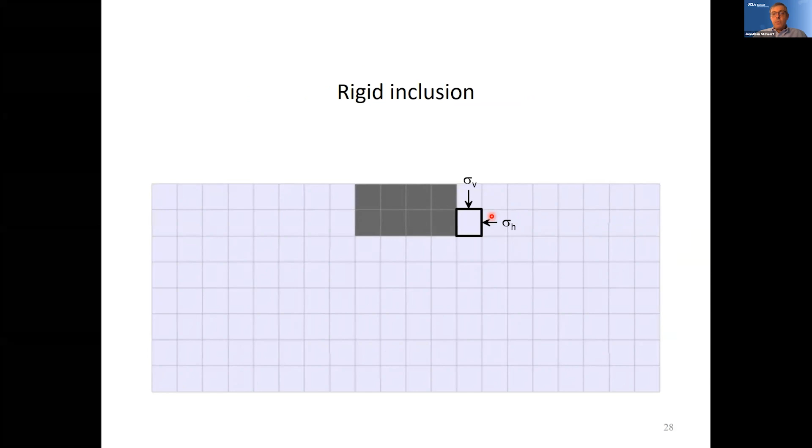Now, of course, structural elements don't have the same mass and stiffness in real life. So if we have something that is at the extreme, which is rigid, now that has to move as a rigid body. It can't conform with what the soil is going to do. And so when an earthquake excites this, you're going to have this foundation motion, which is going to be different than the free field motion, as it says here.

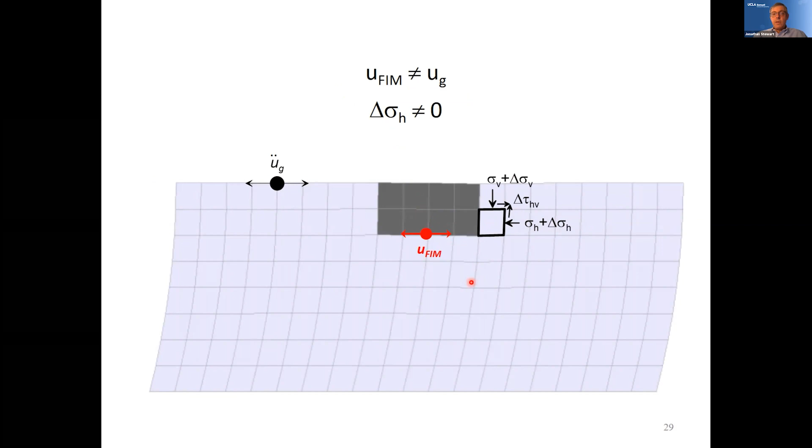And because this motion and the motions over here are different, you're going to have an increment of lateral stress, along with the changes in shear stress and so on. So that's where you get it, relative displacement.

So the key point is that seismic earth pressures are fundamentally related to the relative displacement. And notice that we get seismic earth pressures when we have relative displacement. We do not get seismic earth pressures simply because we have acceleration. You can have acceleration and no seismic earth pressure. So there is no fundamental link between those two.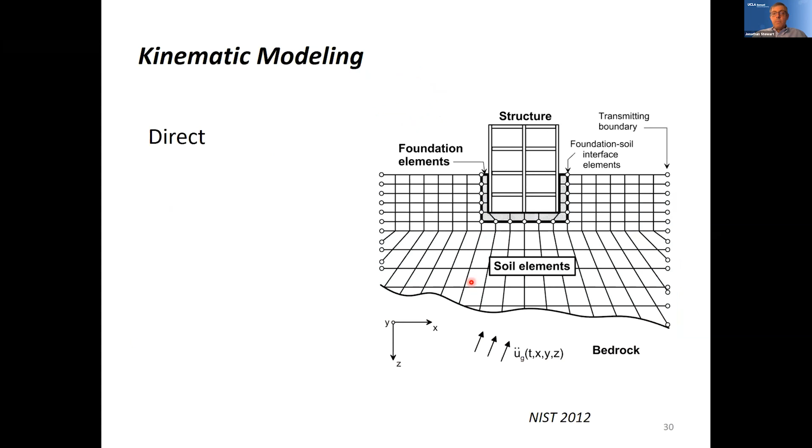Now, the modeling of this, as we've discussed already, can be done through direct approaches. You would solve the kinematic part of this problem by simply removing the structure, and then you would get your kinematic earth pressures. But we're going to focus on simplified methods, and we've essentially tackled this problem over the last 8 years or so.

When I say we, it's a whole series of collaborators that I'll mention at the end, in stages. In the first stage, we basically looked at a basic case involving a rigid wall, uniform soil. There's no inertia, so it's a purely kinematic problem. And we were able to develop a solution for this that can actually be expressed in a closed form equation. And that is paper 1 at the end.

There are obvious limitations of that basic case because walls aren't rigid, soil isn't uniform, etc. So a more complete model was developed that relaxes many of these assumptions: flexible walls, flexible foundations, non-uniform soil, allowing wall inertia to be part of it. This was solved numerically and is presented in paper 2 with a workable model for it. In this workable model, you essentially run time series through such a system and calculate the responses.

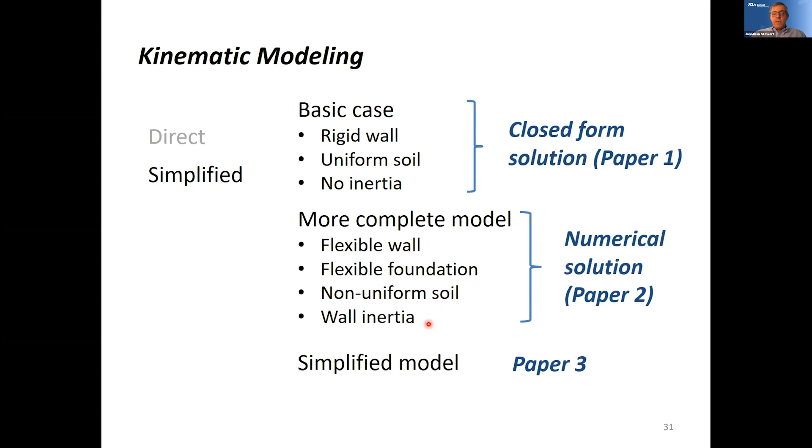And based on the insights from all of that, we've developed a simplified model, which is paper 3. And it's this third one that I'll focus on here in the interest of time. So what I'm going to do in the next couple of slides is illustrate the basic steps associated with this simplified model. And then at the end, I'll highlight the fundamental physical principles that are captured, at least in an approximate way, through this method of analysis.

So, but first, the steps. You need a seismic hazard analysis, and the best ground motion parameter, we think at the current time anyway, for doing this is peak ground velocity. And I would mention that in part because of this and other applications as well, USGS is now working on including PGV in the national maps.

For a particular location, you don't just need the PGV, you're also going to need a period. In order to get a period, we deaggregate to get the magnitude and distance that most strongly contribute to the PGV. Based on that magnitude and distance, we can use ground motion relations to predict a period.

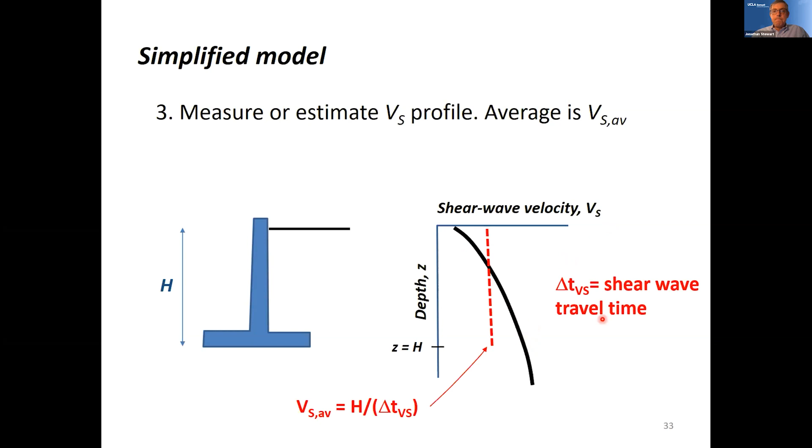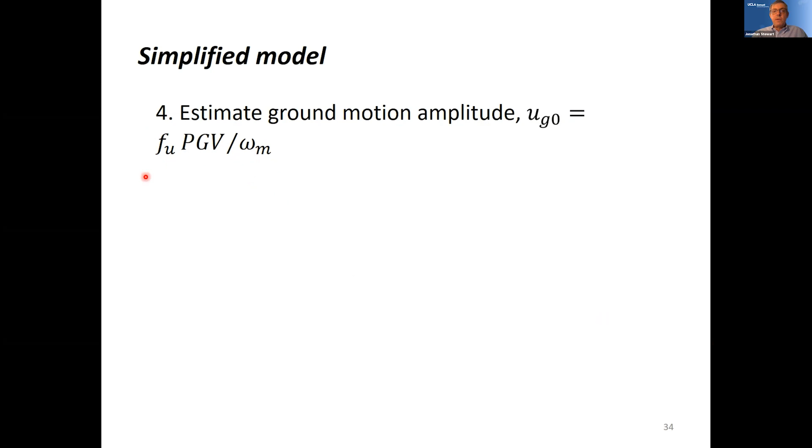Then we need to derive a ground motion amplitude. This is a displacement — we don't use PGD for a number of reasons. What we want is a displacement corresponding to something near the center of the frequency range that really produces energy, and we think PGV is the better parameter. So we convert PGV to displacement by dividing it by that frequency, omega sub m, and then through a calibration process we multiply it by a factor. I won't explain the details, but it basically varies from about 2/3 to 1, so it's not a very big correction.

We need to represent the stiffness of the soil somehow, through a so-called stiffness intensity, KYI — an unfamiliar term to most engineers. Stiffness intensity is simply stiffness, as normally understood as force per unit length, divided by area of wall. If you imagine a spring with a certain tributary area dA, the stiffness of that horizontal spring would be the stiffness intensity times dA. It's a very convenient quantity for deriving our springs. We call it stiffness intensity, KYI. It has units of force per unit length cubed, and it's basically proportional to the shear modulus of the soil.

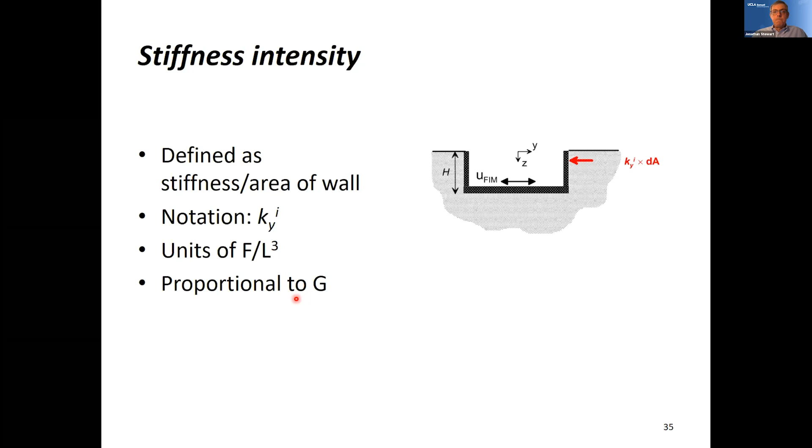The sixth step is estimating the relative soil to wall flexibility — how stiff our wall is in flexure. This beta is a relative stiffness parameter where the numerator is soil stiffness and the denominator is the flexural stiffness of the wall. The ratio of those with the fourth root is not actually dimensionless; it has dimensions of 1 over length. So we multiply that quantity by height, which removes the units, making it dimensionless. Since this isn't always known at the design stage, the geotech may not know the section properties. We looked at many constructed walls in consultation with partners — Marty Hudson, for example, helped give us example dimensions for different cases — and found that numbers in the range of 1 to 2 are fairly conservative. You can get lower numbers, but if you don't know anything, you can use this range to get started.

This is essentially the result. You have the earthquake increment of the seismic earth pressure, which has been normalized, and the height of the resultant, needed to get the moment in the wall from the earthquake. The horizontal axis is the wavelength of the incoming wave divided by the wall height, and the beta H's are the wall-soil flexibilities. The lambda over H ratio, wavelength to height, we get from the previous steps — basically the average shear wave velocity times the mean period for lambda. We have H here, and I mentioned there's a closed form solution for this case.

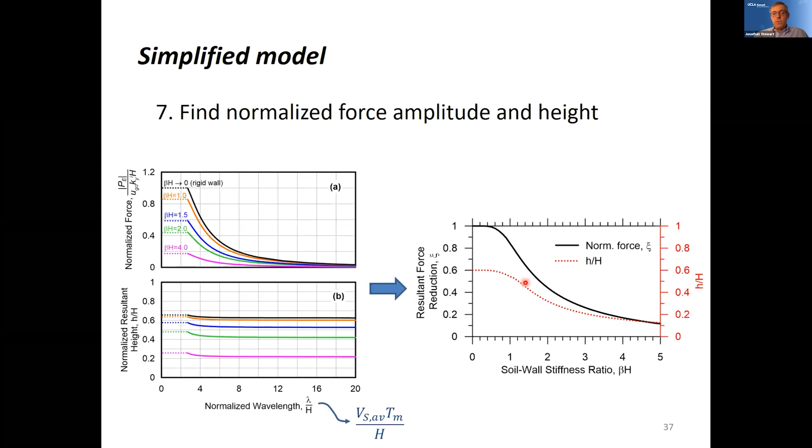That was our first analysis, which makes that case convenient. In order to adapt it for other degrees of flexibility, we have correction factors — for example, the value of this result for beta H2 divided by the one for beta H0, the rigid case. There's a chart showing this, and equations included within our procedures. This applies to both the normalized force, shown with the black line, and the normalized resultant height, shown with the red line.

Once you have this, you simply denormalize the force and calculate the moment as the resultant height times PE. So let's talk a little about the physics represented here.

We have the wavelength effect. Why does this go down? If you have a low frequency wave with a long wavelength, the motion here and here is practically the same. Under those conditions, this motion and the foundation input motion are basically equivalent. You get very small relative displacements and negligible earth pressures—that's the right side of the figure. Conversely, with high frequencies and short wavelengths, this motion and this motion are very different, producing large relative displacements and large pressures—that's the left side of the diagram.

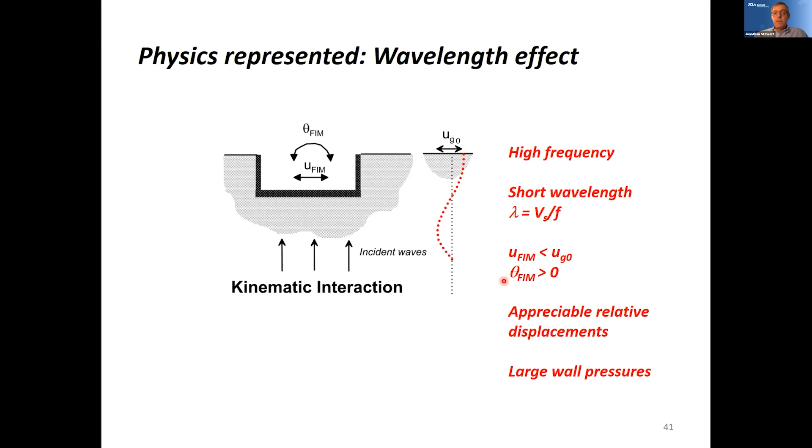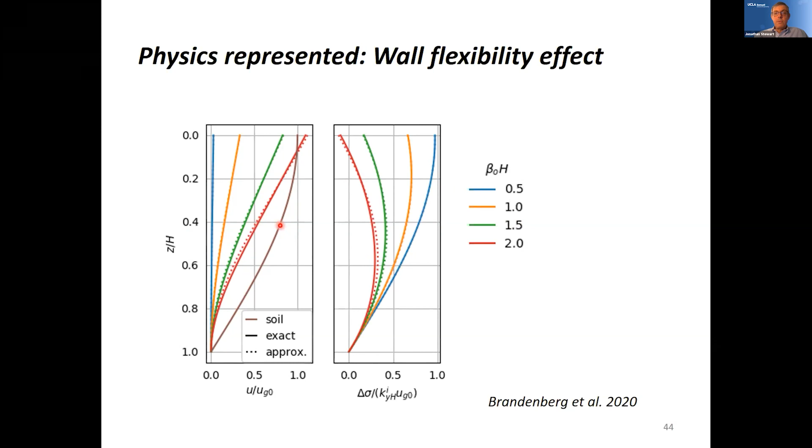If the free field soil and the wall have a small difference, we get a small earth pressure. If there's a large relative displacement, we get a large earth pressure. So the stiff wall with a small beta H produces a very large pressure, while more flexible walls with smaller relative displacements produce much smaller pressures. This effect is accounted for within the procedure.

This has been validated against a number of experiments—the Al Atik and Sitar experiments, and a series of experiments done at Colorado Boulder—where the peak seismic increments are plotted within this range for all these different tests or analyses, which go from beta H zero (rigid) to beta H about 3. You can see it falls in there.

If you take the difference for each individual value of beta H, you can form a residual—the measured minus the predicted. Importantly, the Ostadan results, which were profoundly different from the centrifuge tests when interpreted with Mononobe-Okabe, now fall right in the mix with these tests from Berkeley in blue and the Boulder tests in red.

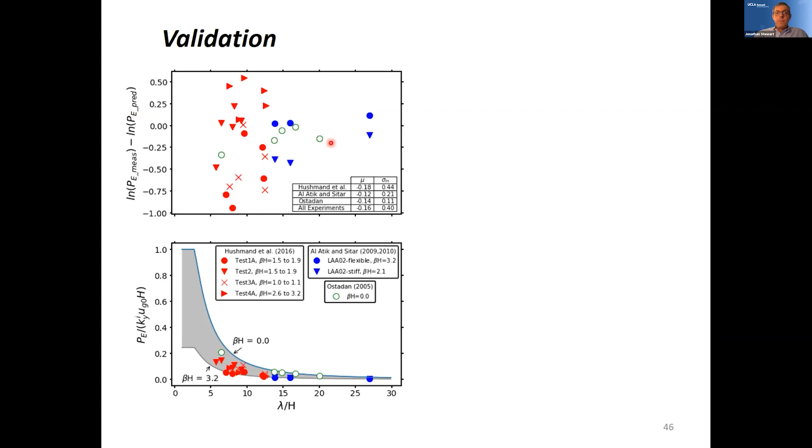You're looking for something close to zero. There can be dispersion, but you want a lack of trend here, which the method provides.

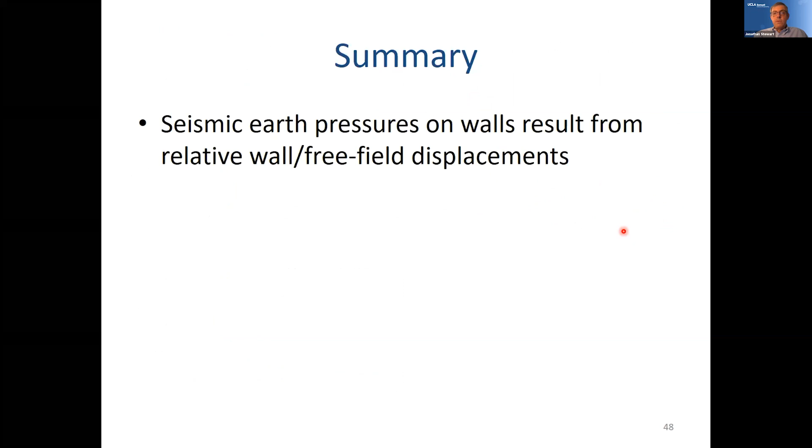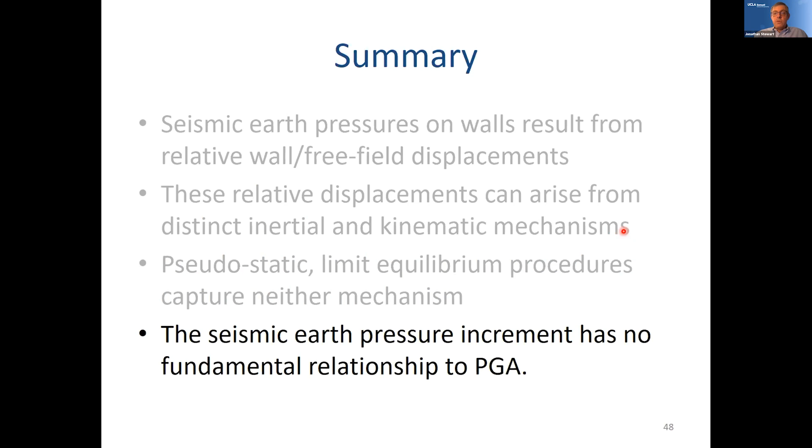So I'll summarize: seismic earth pressures on walls result from relative displacement. They are not related to acceleration in a direct way. These relative displacements can arise from inertial or kinematic mechanisms, and our pseudostatic limit methods do not capture either of those mechanisms. There is no fundamental relationship between these seismic earth pressures and PGA.

If we go to SSI-based procedures, we're able to capture the observations from a wide array of sources, and we're able to resolve conflicting findings from the literature. That's what tends to happen when you do things on a fundamental basis—usually works out that way.

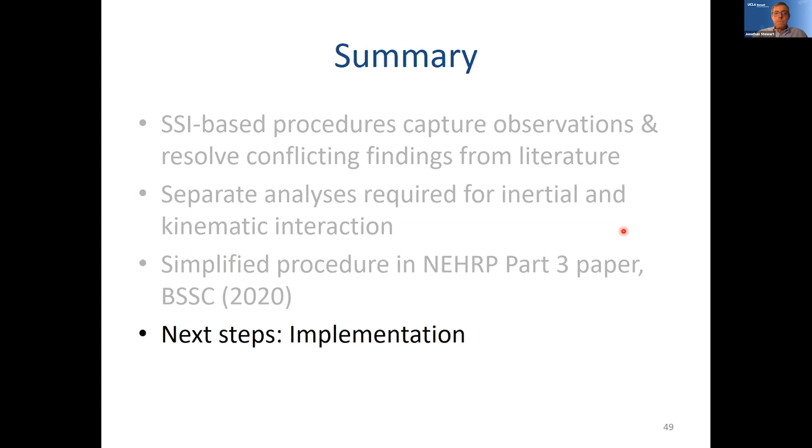We need a different type of analysis for inertial and kinematic, just like we do now for the other analyses discussed in this session. The simplified procedure I've described is now in a NEHRP Part 3 paper, publicly available, which gives some justification for using it. But I think the next step is we need to start seeing this get used. Inevitably, issues will come up—that's always the case. Maybe we need an ATC project on this topic so we can advance our practice.

These are the papers I mentioned, and the procedures are actually available on a publicly accessible DOI, which you can run in the cloud. My collaborators: Scott Brandenberg at UCLA, George Mylonakis at the University of Bristol, Maria Giovanna Durante at the University of Texas, but actually living in Italy. Thank you very much.